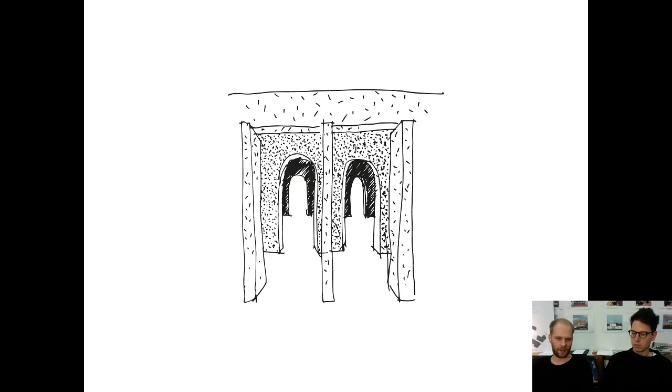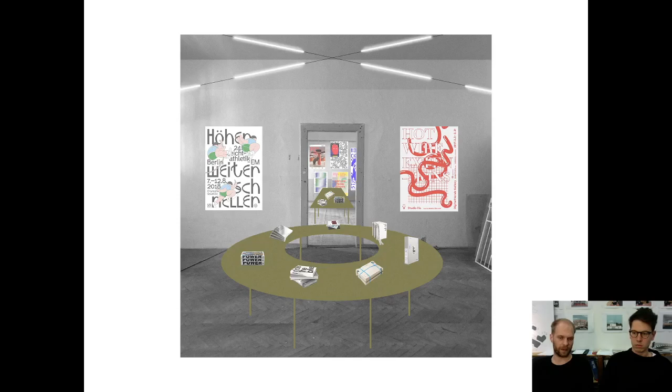For us it's really important to present our work with different types of visual art, as we can say, because we believe that architecture is functional art. With this type of sketches, drawings, collage, or whatever it is, we believe it's the best way to show the most important part of the project, or the most important visual atmosphere of it.

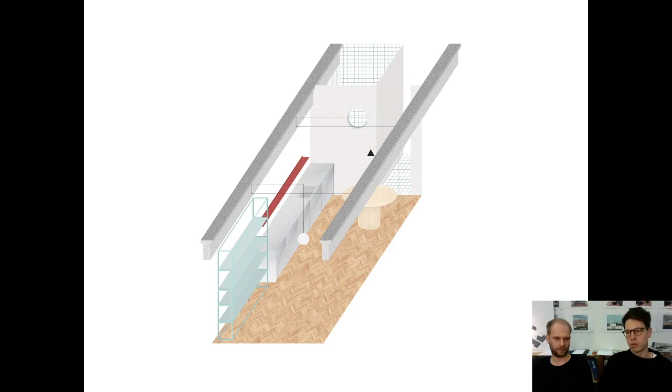On purpose we are trying to avoid basically visualizations. We use them, but we try to avoid them as much as possible, because we believe that when you have a really concrete, realistic image, it's more about the materials, the light, and all the surfaces, and you don't focus on the concept of the project. So this is what we are trying to show with this kind of images or collages which we are using.

Sometimes different techniques, but it's more about the way of presenting the space which is behind.

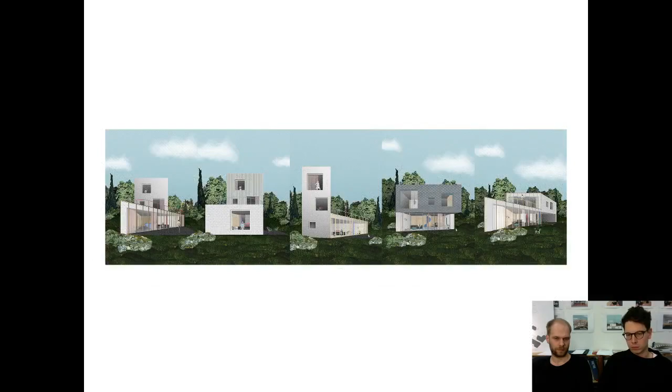One of the most important topics we work with in our office is context. We work in context, with context, and we're going to show you this on basically 5 projects, which are completely different scales, different field or different concept, but basically in all of them we work with context.

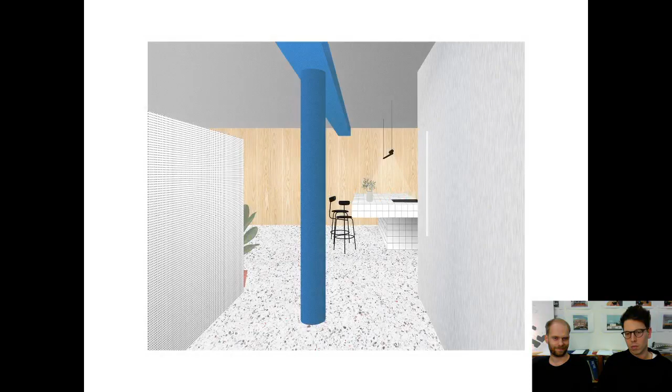The first project is called Pool Flat, or we are calling it Fake Pool Flat, because it was a former pool in a family house. The house was built in the 90s, so it's a bit of a bizarre shape.

This is the former state of the floor, and our friend Katarina called us saying they are not using this space anymore, and she wants to turn it into a flat for living. At first we were a little bit surprised, talking about how we can turn this somehow into a flat.

But on the other hand, it's in a really nice place in the city. It's basically in the garden, so you have direct access to the garden.

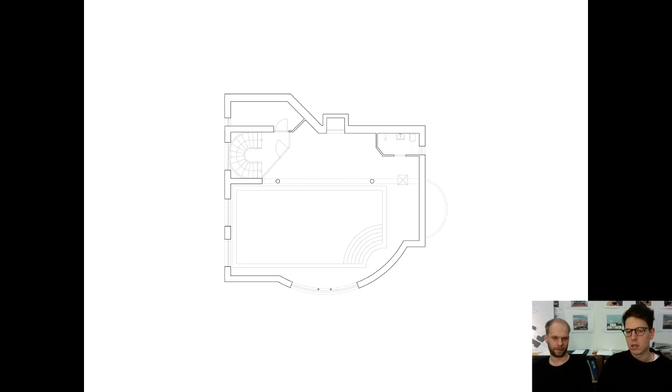So we somehow turned it over, but we kept a small part of the swimming pool in the living area, so you can have a different perspective on the space, and it somehow resembles that it was formerly a swimming pool.

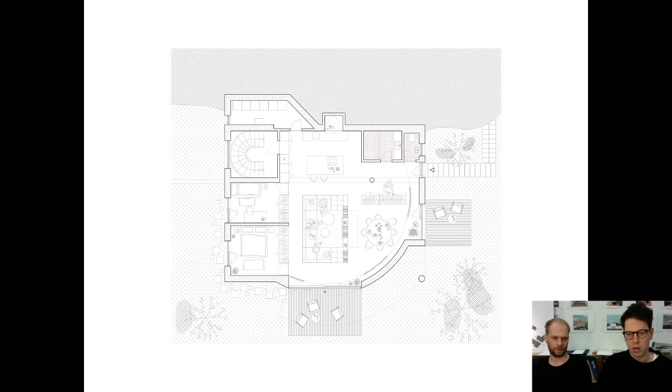We divided the space with only a few elements inserted into it, and the rest is just free flow space between all the elements. So the elements are dividing the space into different zones.

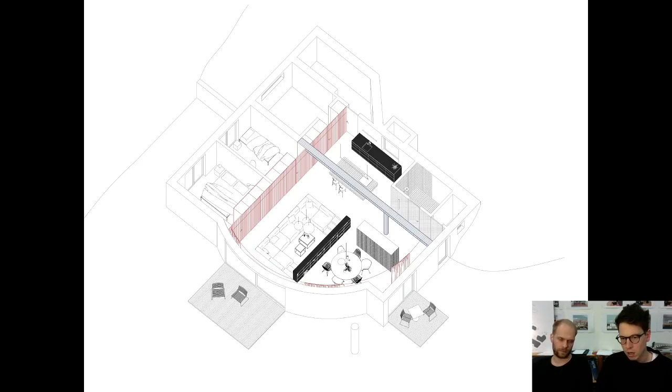The bedrooms are really functional, only for sleeping, and that's it. The rest of the area is dedicated to this living zone, which somehow connects to the garden and the spaces in the surroundings.

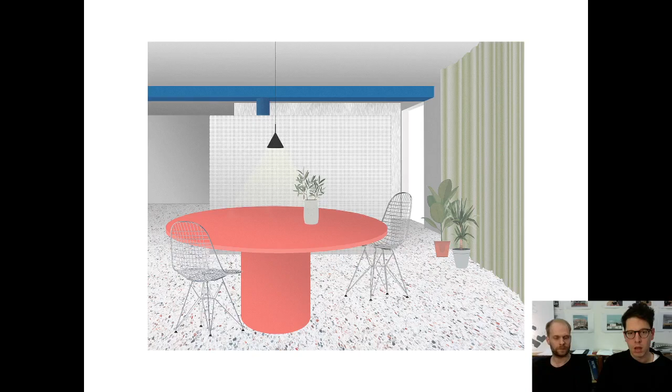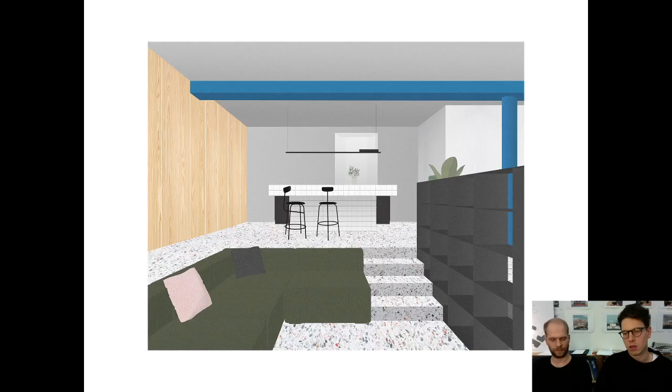All the elements are somehow unique in materiality and shape, and one of the most important is this blue column, which is holding the whole floor that was there before, and we made it more visible in the space, showing what the whole floor stands on.

In this actual state, the flat is not fully finished yet - this was kind of an opening party - but we are still missing some elements in space which will fill it and divide it into zones.

The next project is a house for our friend Martin. It's basically a really small house, both in shape and in square meters, located more or less outside the city, in a small village with gardening plots or something like that.

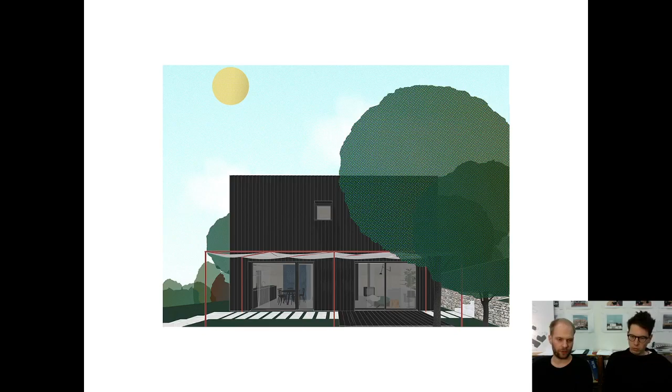The site is typical in shape - really long and narrow, but sloping. So we were thinking how to connect this house to the needs of the site.

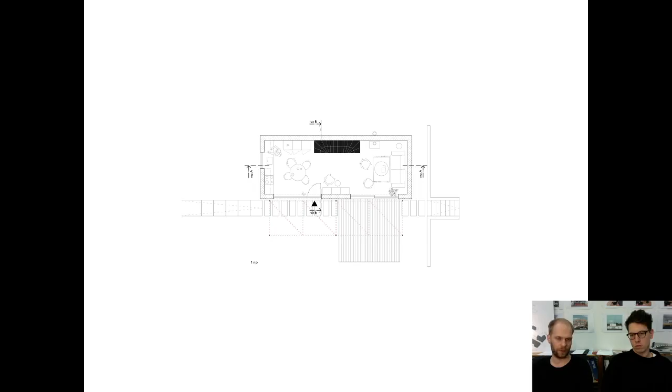Since they really love to live outside, enjoying the garden and its surroundings, we made a small house in the shape of the site, and put the kitchen and living room on the first floor, connected with the exterior and the garden, with the other functions on the second floor.

The house is still in process, so we are still missing the garden surroundings, but it's really a kind of cottage house, resembling more of a cottage, though it's used for full-time living for a small, developing family.

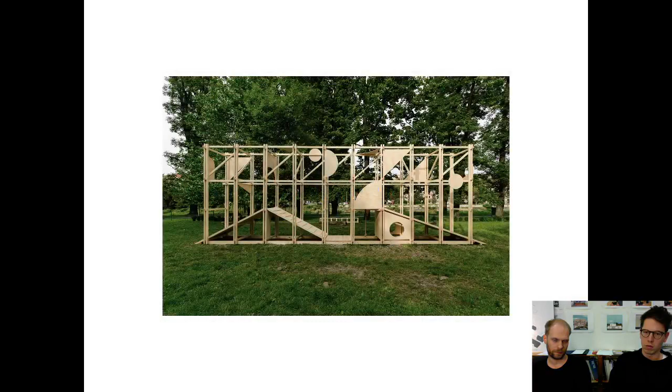Okay, so the next project we are going to show you is a bit different. We were invited to a workshop in Těšín, a city near the Czech and Polish border. The city is divided into basically two cities, but it works as one city. We did this project on the Czech side near the river.

There is a dog playground dedicated only for dogs, and this was an international workshop which we did with students, and the assignment was to design basically a dog playground. When we were thinking about this project, we came up with the idea that we weren't going to put only some obstacles for the dogs to play, but we came up with this idea of a functional monument.

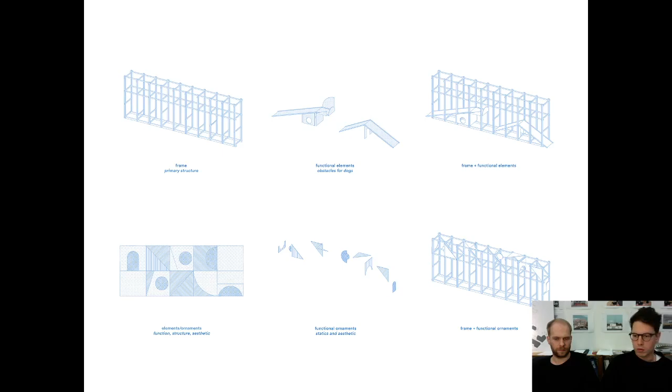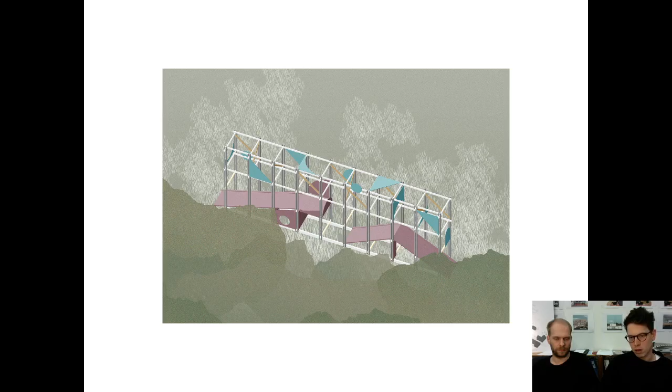So it's kind of a statue placed next to the river, and it's somehow functional. But on the other hand, it has this aesthetic value or aesthetic function. Later, when we talked about it, we came up with this second concept, based on functional ornaments. We went through this idea of ornaments in architecture, and in this case we used most of them as structural elements, supporting the whole structure, and then all the leftovers we used as decoration on top. So it's a mixture of functional and aesthetic elements put on structure.

So the next project is called Langosh Bar. It's small in scale, but it has a huge impact on the location of a square where a lot of hipsters gather and meet. This small bistro is part of a market building, and basically it was a really tiny place, and we just used the empty space.

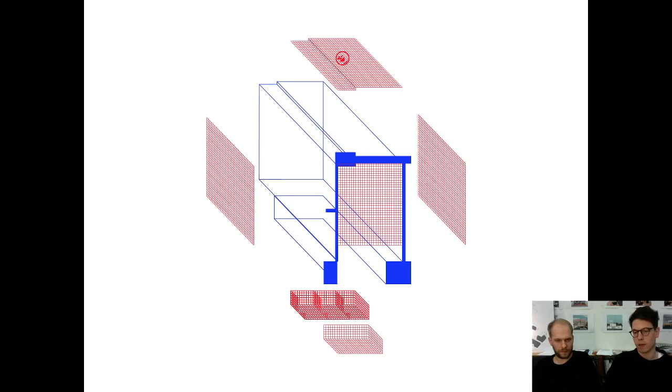We put inside a box made of white tiles, which you can see here, and it's a really simple, small intervention, because it's just the kitchen and bar basically. So it works in a day as a langosh bar, where they fry langosh as a meal, and in the evening it works more or less like a bar.

We basically call it Jekyll and Hyde, because during the day it's super clean, super tidy, and in the evening it really turns over, and there's a huge party around it. It works very well with this square. It's a kind of intervention to the city, that when you put a really tiny place, it attracts a lot of people, so the city gets more livable in its surroundings.

So we came up with another store or function in the city that's connected with the street and attracts activity to the location, and it's really nice to see how it works, and it works properly. It means people are coming to the area, making the city more livable.

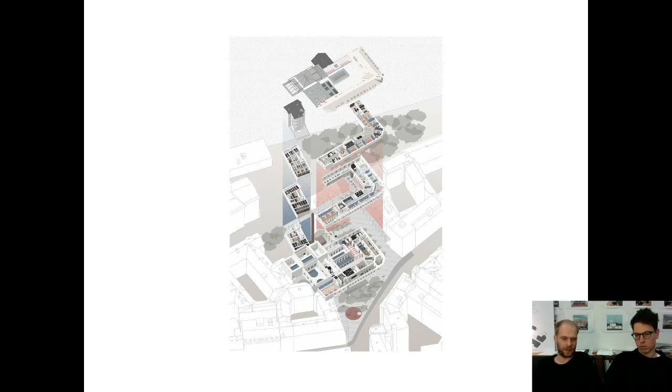Basically the building is really nice from the outside, but really messy from the inside, because it had, I would say, 5 or 6 different reconstructions, remodelations, and additions. The former floor plan was really messy, and we spent really a lot of time thinking about how to set it up properly.

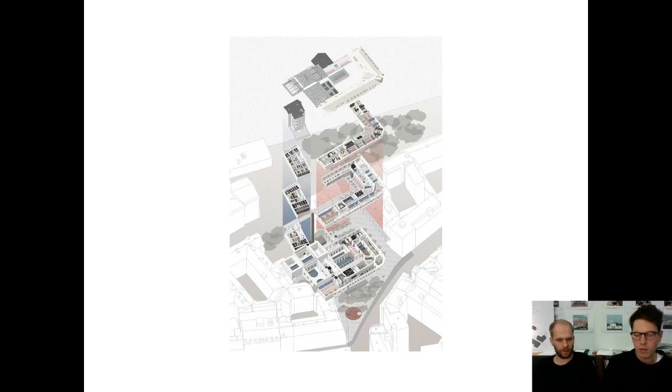The program for this location was both the public baths, and as well a public library, which should be located in one part. So it was two different institutions which you somehow have to combine together, to not disturb each other, but have some sort of connection.

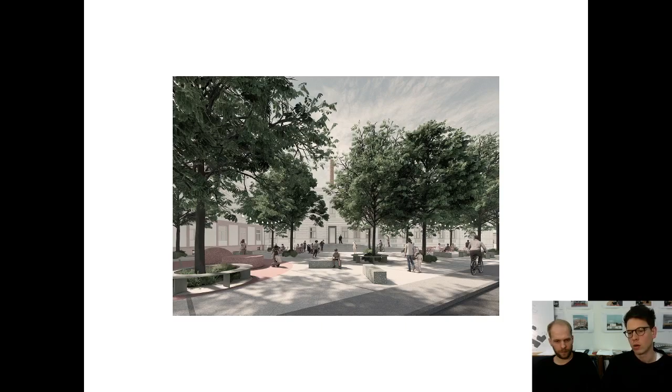This building is located really in the very center, but the surrounding is somehow not really connected to the building. So we came up with this idea of a public square, which is directly connected to a cafeteria located on the first floor. During the summer, you can basically expand the interior for this area, and sit outside and use this space as well.

We also opened this other courtyard, which was formerly a heating room. We located the main entrance to this building, and created a public square in front of it, which somehow touches the facade of the other house as well, and activates the shops on the first floor.

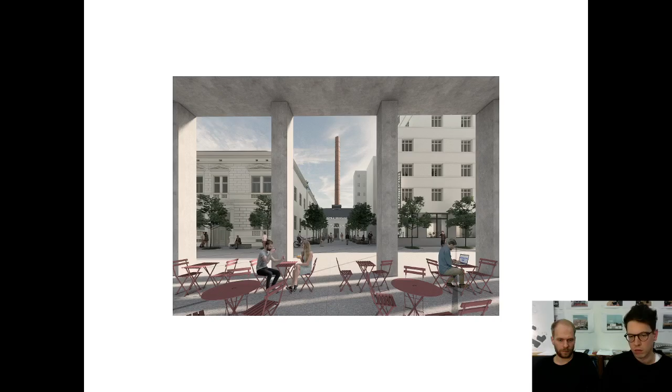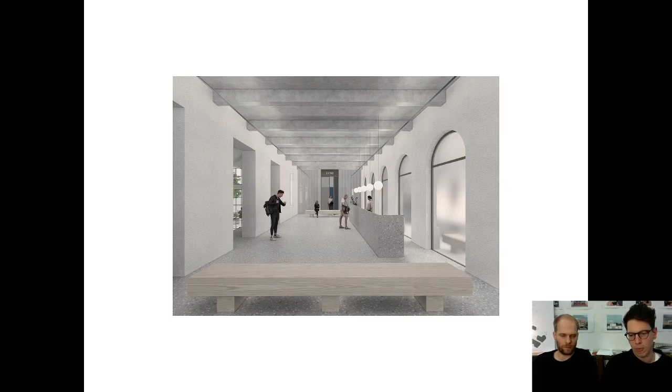This is the main entrance, where we basically worked with the former state of the building. We use these arcades which were there, and we somehow made it visible that from the entrance, you can have the connection directly to the public baths already. We try to work with these arcades and connect them in layers to make it more visible.

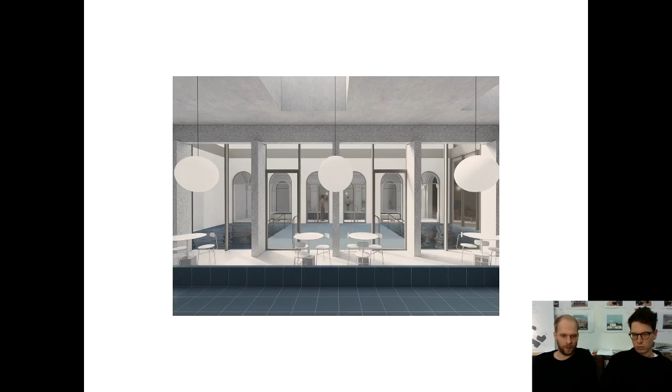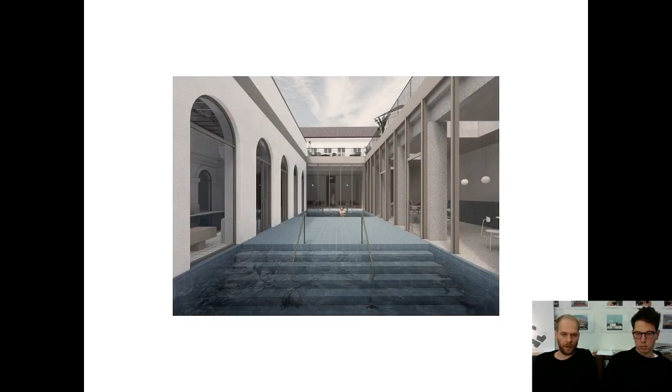With the patio, we try to get more light inside, which is really beneficial for the baths. We also created another exterior pool or bath area.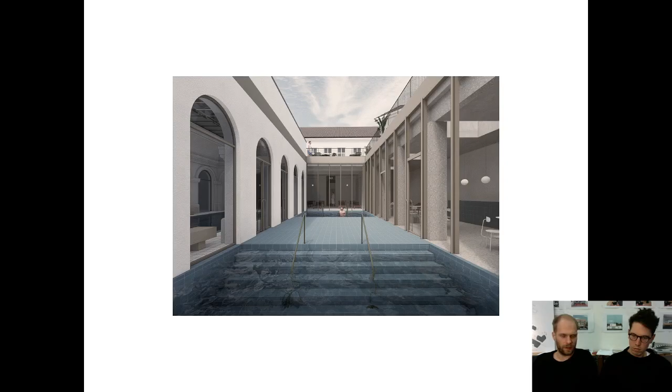I don't know what you're gonna say. Well, me too.

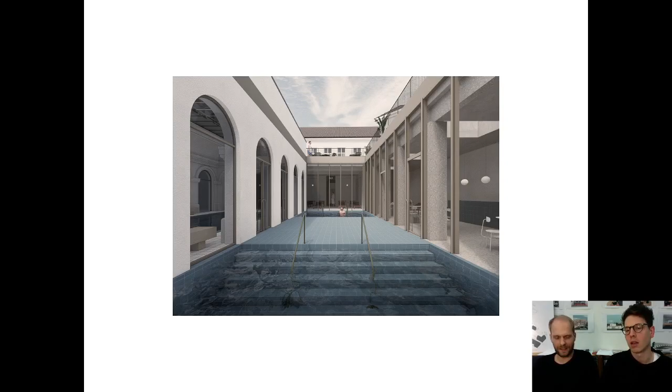We somehow tried to expand the former swimming pools, because there are two large swimming pools inside the building, and we are really in a dense city center. So having some sort of exterior space is really beneficial for this area.

What I also wanted to mention is that from the outside, basically we didn't touch the building, so you see it in its former state as it was before, but all the interventions were done from the inside. All the newly inserted facades and floors are visible, but they are inspired by the old structure, old facades, and these arcades.

This is due to the former swimming pools. These are the hot tubs and cold pools, which are connected to the sauna area. This is the main pool, which has an openable roof that's going to be reconstructed, so during the summer months you can open the roof and have some sort of exterior space here as well.

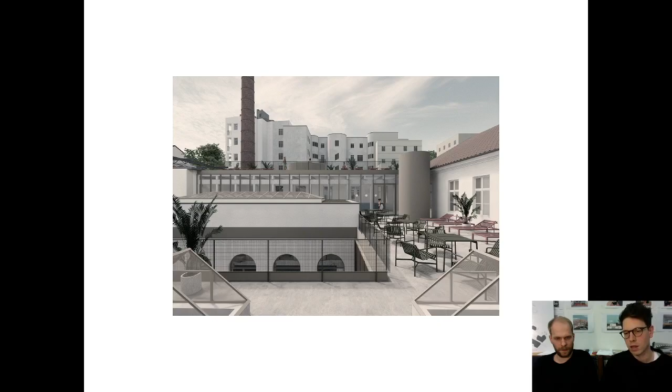What was also really important for us was to work with this so-called fifth facade, the roof terraces, which we got inspiration for in Budapest, where we went to see some local baths. We think it's really necessary, or really great, to use all these terraces for the views, so you can have views on the roofs, on the surroundings, and some sort of different experience from the baths, and also from the city.